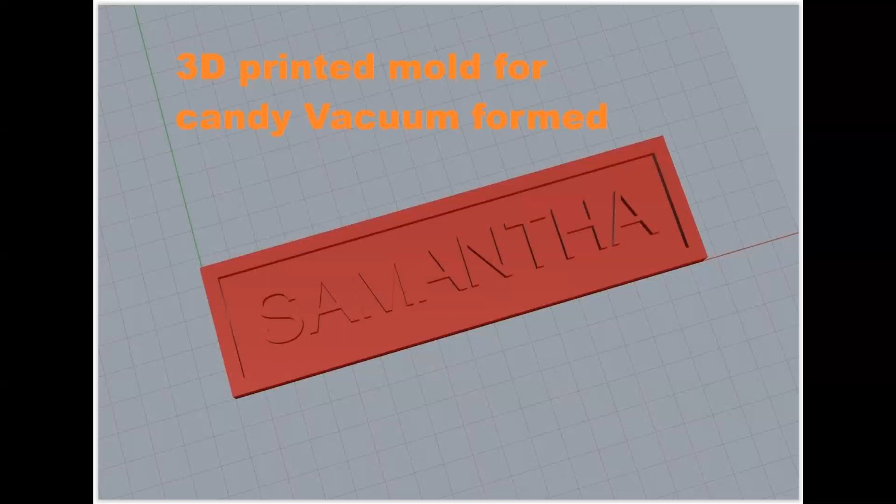This is going to be a short instructional video using Rhino to design a 3D printable mold for vacuum forming to make a chocolate mold.

Today we're going to draw in Rhino a candy mold that can be used to make chocolate molds. I've made some measurements ahead of time, and we're going to make a small mold with the word Samantha on it, which happens to be my granddaughter.

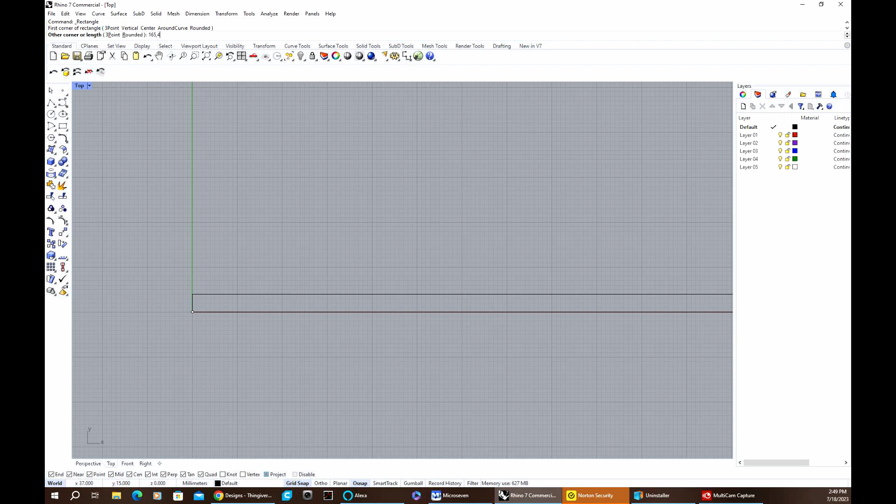First thing we're going to do is decide the outer perimeter. So we're going to select the rectangle function and put in the width of 165 millimeters, comma 45 millimeters. Okay, so now we have the outside perimeter.

I know I want a standing wall, so we're going to go curve, offset curve, select this curve, and put in a distance of 5 millimeters to the inside. So now we have the size and the background of our candy mold.

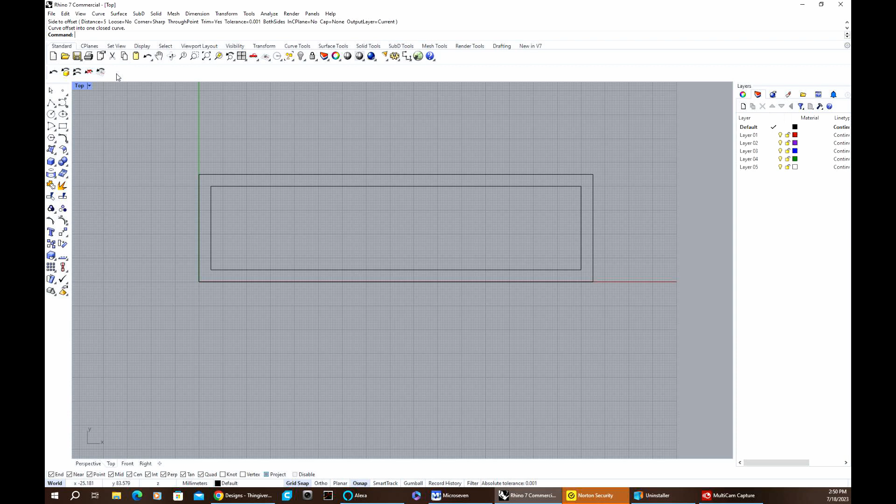This is really a pretty simple project. So what we're going to do now is put the letters in. I go down to the text object, and the height is 18 — yes, I've already set that to 18. I want the Arial font, and I want a solid that's going to be 6 millimeters thick.

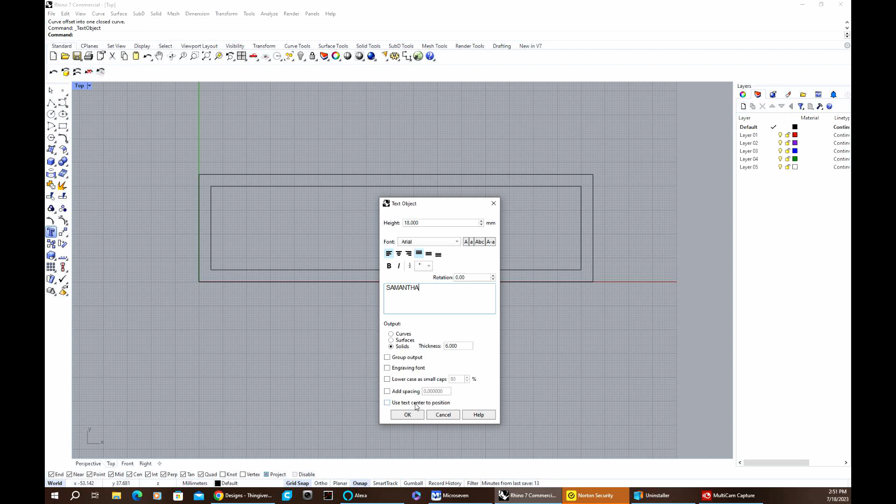So let's go, we'll type in the letters: Samantha, S-A-M-A-N-T-H-A, okay? And there's going to be solid. So we'll put that right up in here, and we should be able to just put that right there.

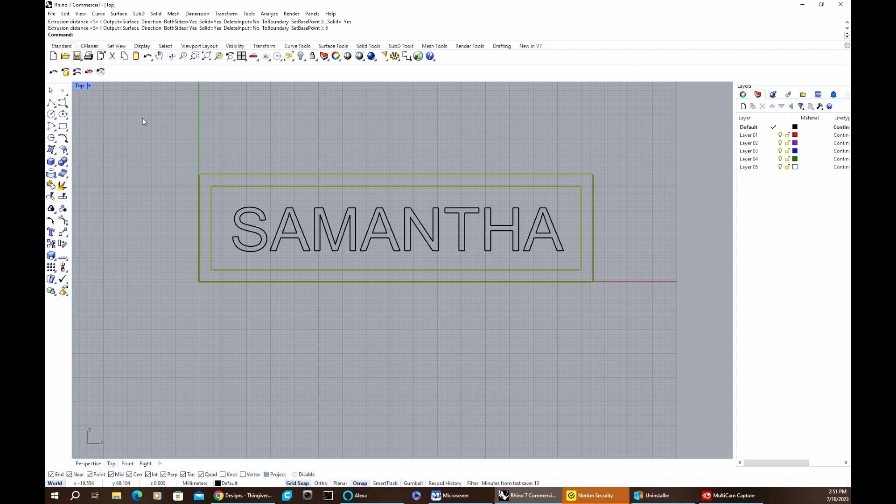Now we want this outline in the background to also be 6 millimeters. So we'll do a solid extrude planar curve straight, and we'll have that be 6 millimeters. Okay, now let's look and see what we've got.

That looks pretty good right there, except we're not quite done yet, although we're real close. The Samantha is floating in the air, so what we need to do is bring the background up to touch the letters.

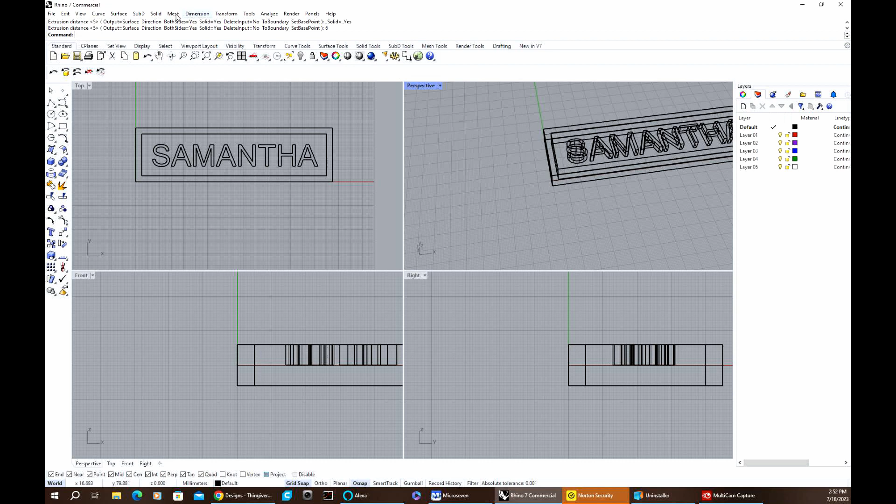How we're going to do that is we're going to do a solid, and extrude a planar curve straight, this outside curve — oh, okay, well, let's go back a step, because I made a mistake.

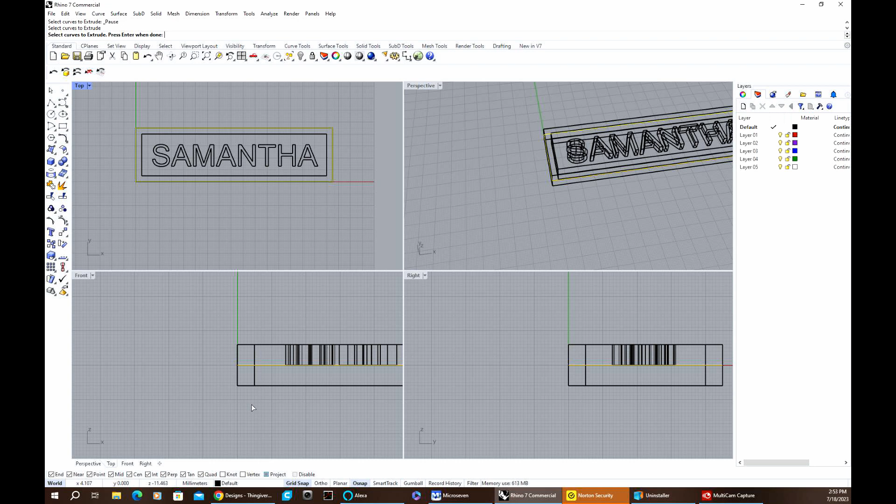These letters are 6 millimeters high, and when I extruded the perimeter, I had the command set to both sides of the original curve, so I have 6 millimeters above and 6 millimeters below. So let's do an undo all and get back — okay, extrude curve, that's the one we did, so we'll take that off. Now we're back down to where we want to be.

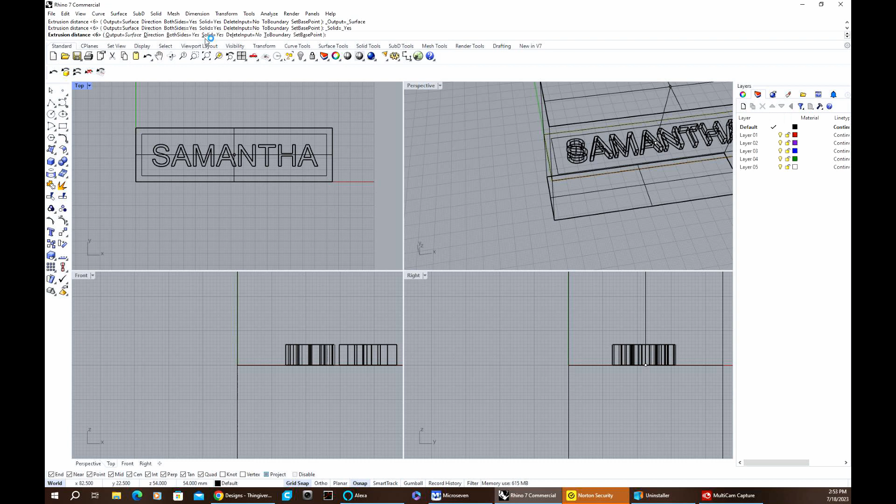In fact, let's do it a little differently. Let's bring the background up — solid, extrude planar curve straight — and we'll bring that up. Oh, okay, see there? Both sides — we have to click that command so it only comes up in one direction. And we want to come up 3 millimeters, okay?

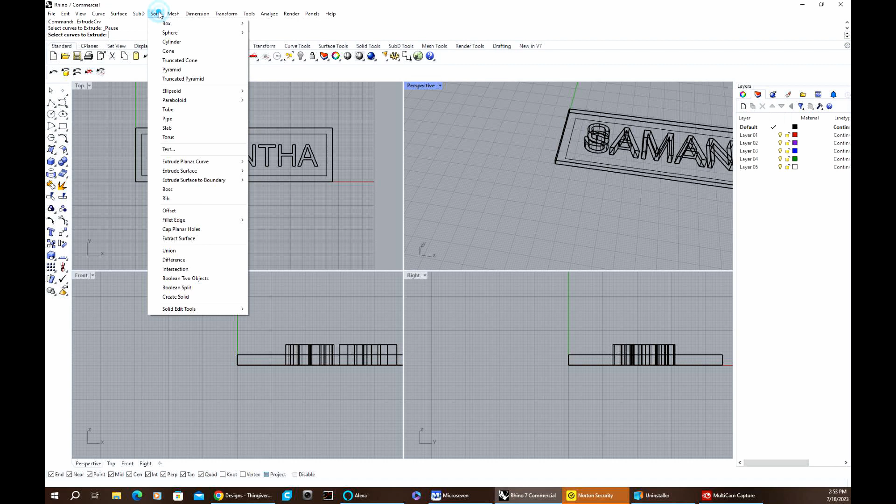And then we've got one more thing to do, and that is to bring the sides up. So again, we're going to do solid, extrude planar curve, straight, that curve and that curve, and we're going to go 6 millimeters.

Okay, we're almost done. Wow, this is going pretty quick. So let's bring this up full screen so we can see what's going on. But we've got one little job yet to do.

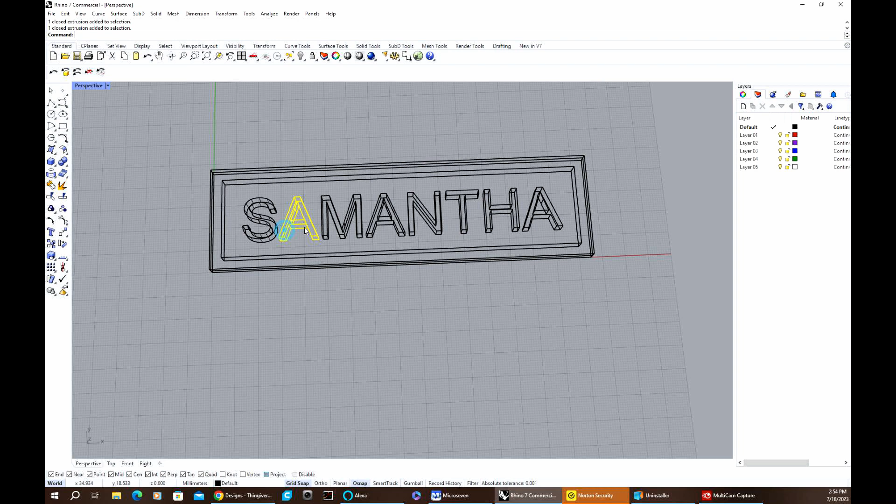All of the letters are separate, the outside perimeter is separate, and the background is separate. So what we want to do is weld those together. In Rhino, they call that a Boolean union.

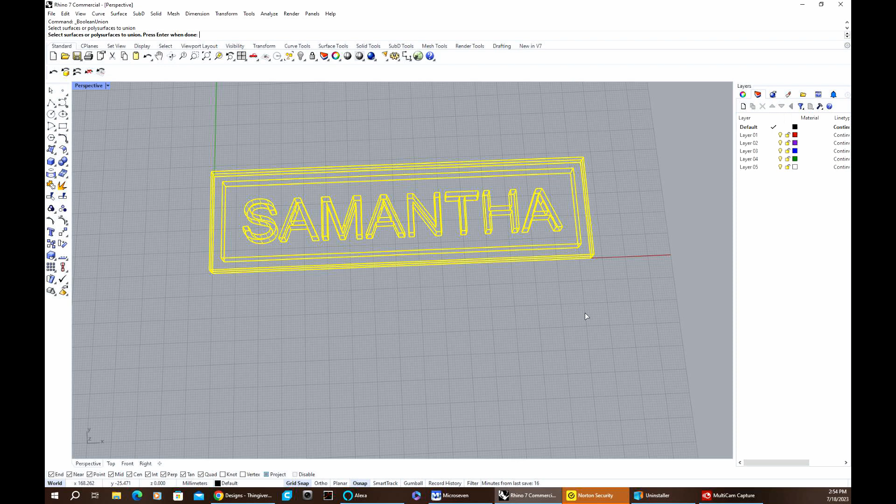So we come over here and get our two little spheres that say Boolean union. Now we can highlight it all, hit the enter key, and now it's all together in one piece. Now let's render that to see what it looks like.

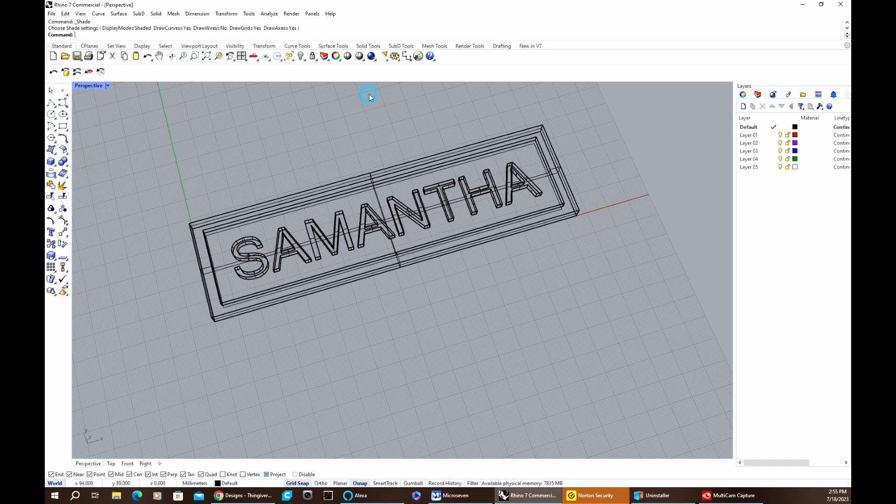I find that it's easier to see things in red, so we're going to come over here, go to the layer command, and move that to the red layer, okay? Then when we render it, to me it looks a little bit better — easier to see, the lighting seems to highlight what's going on.

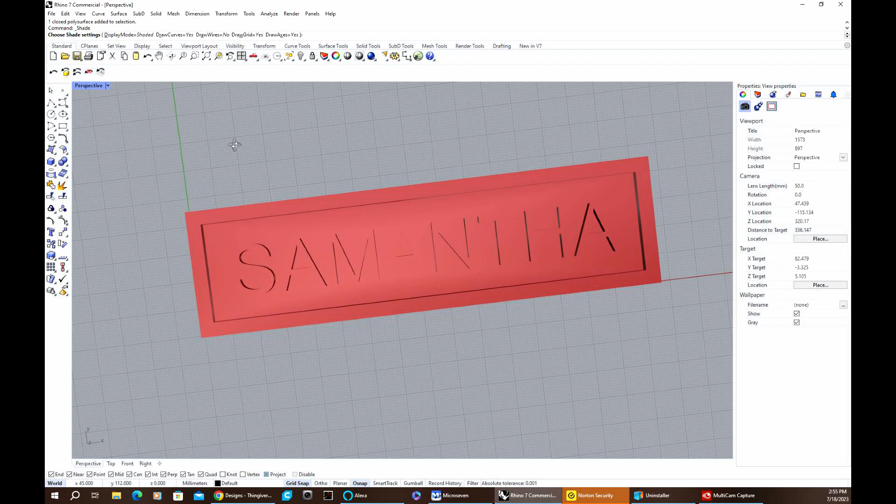Well, that's all there is to this step. The next step will have to be, and it'll be another video, where we use my vacuum former to vacuum form a sheet of thin plastic over the top of this, leaving a negative of this object that we currently have in the thin plastic, and then we'll be able to pour the hot chocolate into that.

Now, in the video, what I'm going to do is take some pictures of those steps, not all the way and in all the detail, but kind of the finished product, and we'll put that here.

In a later video, I may do something with a very inexpensive vacuum former that I built — actually, I built it for a high school teacher friend of mine who wanted a vacuum former that was very inexpensive, with inexpensive materials, and I think that'll make an interesting video.

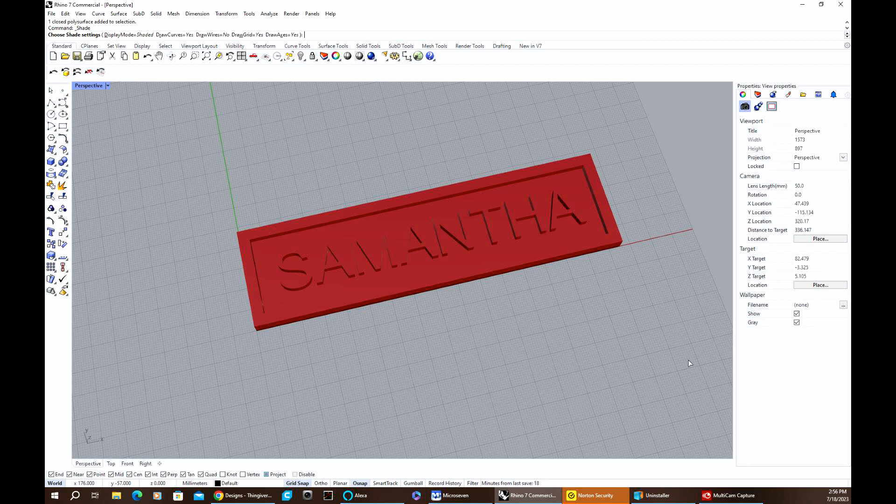Okay, that's all for now.

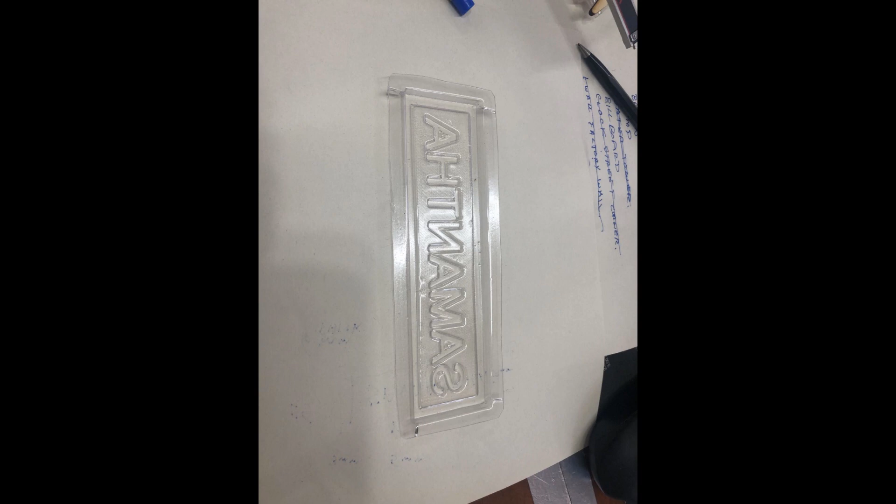We have the part that came off the 3D printer. Looks pretty good. There it is with the vacuum forming over the top of it. That's the thin plastic ready for the chocolate.